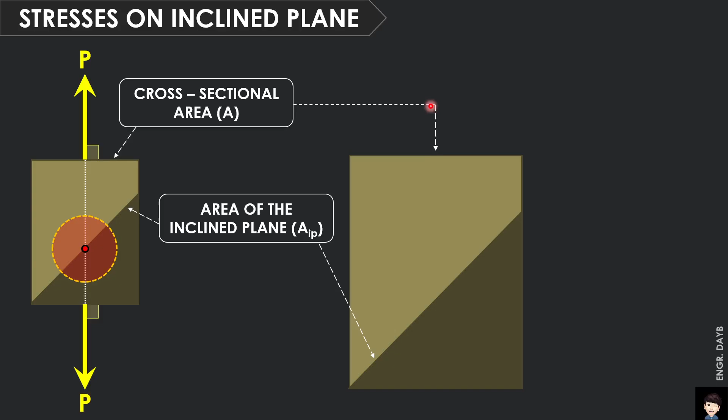Based on your statics, when one force is considered with respect to the inclined axis, we are dealing with XY only, or two-dimensional horizontal and vertical. This force P will be converted, so to speak, into its components. This means it will have a breakdown with respect to this inclined axis. With respect to the area of the inclined plane, there is already an angle involved.

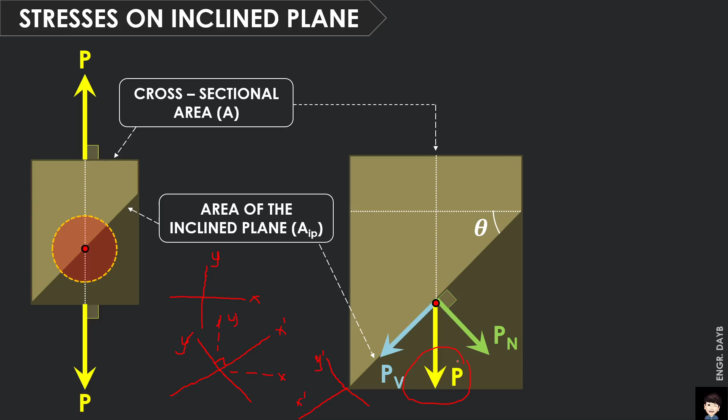Since it's not automatically inclined or parallel, we break it down based on the inclined axis. So you have P sub N, normal, perpendicular. Then you still have parallel, P sub V, due to the inclined plane. Now, how do we resolve these forces?

Consider this again, that's your center point. Based on your statics, we use what's called a force polygon, also known as the parallelogram law, or force triangle, if you recall from your first topics in statics. Since three forces are involved, we form a force triangle. This is force P, this is force shear, and to close the polygon into a triangle, we close it with Pn, P sub n.

And take note, that is 90 degrees, again, with respect to the inclined axis. Because this is the area IP, the area of the inclined plane. Okay? So that you understand better.

Now, if you notice, let's relate this to the inclination. So, with respect to the axis of the cross-sectional area A, this is our area A. Then this is the angle of inclination. So now, let's resolve the triangle to relate this angle.

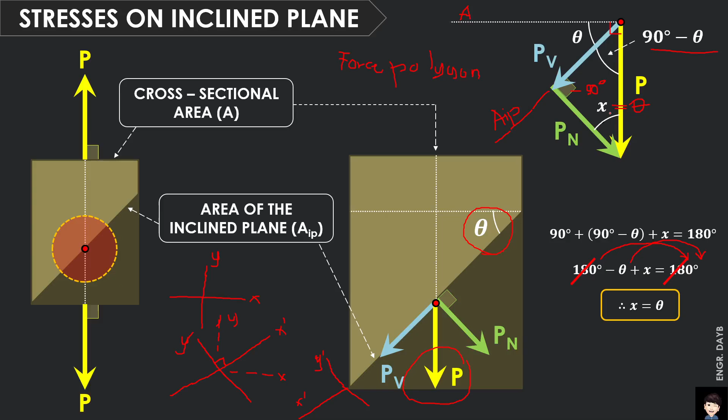Okay, so here it is again. This is our material. This is the cross-sectional area, horizontal. Then this is the area IP, or the area of the inclined plane.

So due to this PN, this normal force, with respect to the area of the inclined plane, will result in normal stresses. That is sigma with respect to AIP. Then this P sub V, the shear force, will also result in shear stresses with respect to AIP, that is tau.

So the concept is still the same, guys. The general concept is still force over area.

Okay, then let's consider this triangle. This small triangle comes from here too. This triangle is at 90 degrees. So we can see the horizontal area, or the cross-sectional area A, then this area of the inclined plane. Then let's consider this one angle.

That is the angle theta. When we solve that, let's recall our trigonometry when solving a right triangle. So we have SOH-CAH-TOA. This SOH-CAH-TOA is very powerful.

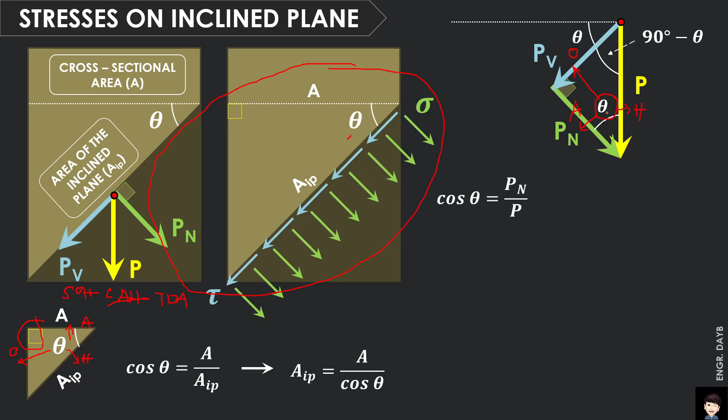Because if you rotate it again, the hypotenuse will become inclined. So, considering Pn and P, that must be adjacent over hypotenuse. This is adjacent, this is hypotenuse, that's why we will use cosine. Then solving for Pn, just cross multiply, so we have Pn is equal to P cosine of theta.

So ngayon, let's solve for the stresses. Diba ang normal stress is equal to simply force over area lang talaga. Pero anong force nang involved? So with respect to area of inclined plane, so we have the Pn over the area of inclined plane. Kaso kasi guys, pagdating sa mga problems, hindi ganito kaagad yung binibigay. Ang binibigay madalas itong P.

So we need to solve those stresses in terms of P with respect to area of inclined plane. So kailangan nating i-convert pa. So itong Pn, gawin nating P cosine of theta over itong area of inclined plane, substitute mo dito yan. Okay. So, we have area over cosine of theta. O guys, hindi magka-cancel yung cosine of theta, kasi from algebra, itong cosine of theta, fraction over fraction, parang ganon, tataas po ito. Okay, magkakaroon ng reciprocal dyan. So, magiging cosine times cosine po yan. So, mangyari, to solve for the stresses, or the normal stress rather, with respect to area of inclined plane, is equal to P over A cosine squared theta.

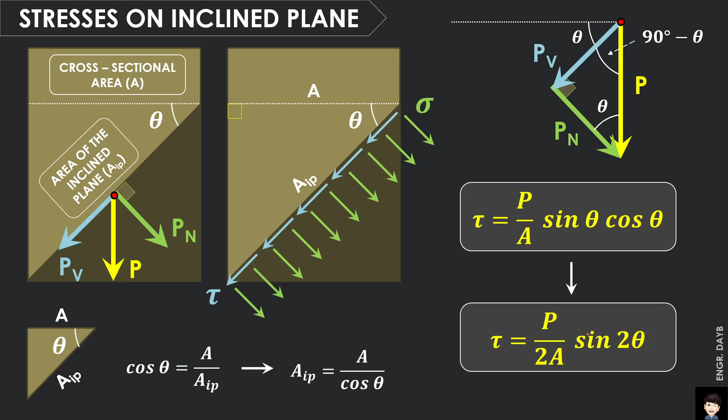Okay? Pero merong another way in order to solve this shear stress, no? Kung gusto nyong gamitin to, pwede rin ipakita natin. So, we have the shear stress is also equal to P over 2A sine of the twice of the angle, theta. So, sir, saan po nanggaling po yan? So, based po yan sa trigonometric identity na take note, sine of 2 theta is equal to twice of sine theta cosine theta.

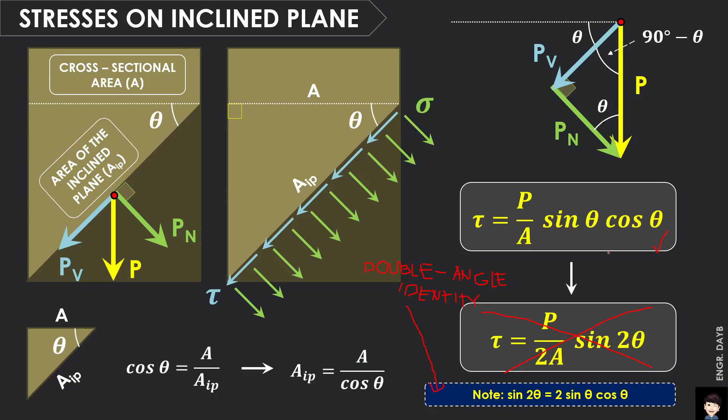So, this is tinatawag nating double angle identity. Okay? Double angle. So, isulat na lang natin for your information. So, double angle identity yan. Hopefully, na-encounter nyo po yan sa trigonometry. Pero kung hindi na, edi additional info nyo na lang. Okay? Identity. Pero madalas, guys, sa problem, kapag ang sinasuggest ko dyan, hindi ito yung gagamitin nyo. Ito. Medyo mahirap kasi yan. Baka malito kayo dyan. So, ito na lang yung gamitin nyo, guys. Balik tayo sa unang konsepto. No? Yung P over A, sine of theta, cosine of theta. Kasi mas madaling gamitin po ito.

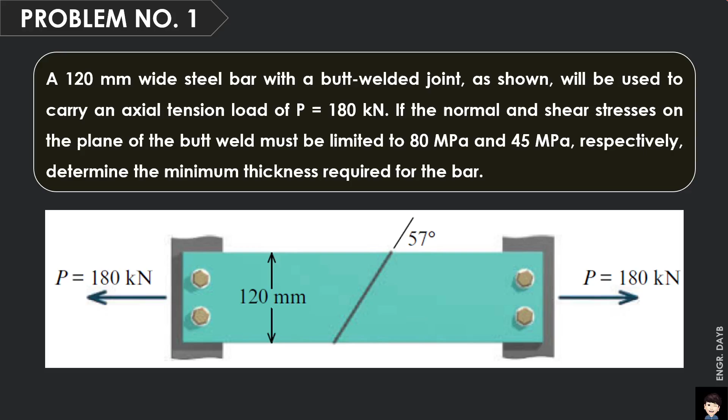Okay? Sige. Solve tayo ng problem. So, I prepared 2 problems for this lecture. So, we have problem number 1. So, a 120 mm wide steel bar with a butt welded joint as shown will be used to carry an axial tension load of P equal to 180 kN. So, if the normal and shear stresses on the plane of the butt weld must be limited to 80 megapascals and 45 megapascals respectively, determine the minimum thickness required for the bar.

Okay? So, kung papansin nyo guys, yung P natin is equal to 180 kN, no? At ito, with respect to the cross-sectional area A, so obserbahan lang muna natin yung problem, no? Para mas madali natin ma-analyze. So, that is the cross-sectional area A. And with respect to its line of action, that is perpendicular to that area. But since binigyan ka ng cutting section, na ito po yun, ito yung naging area of inclined plane natin, which was set to 57 degrees with respect to horizontal.

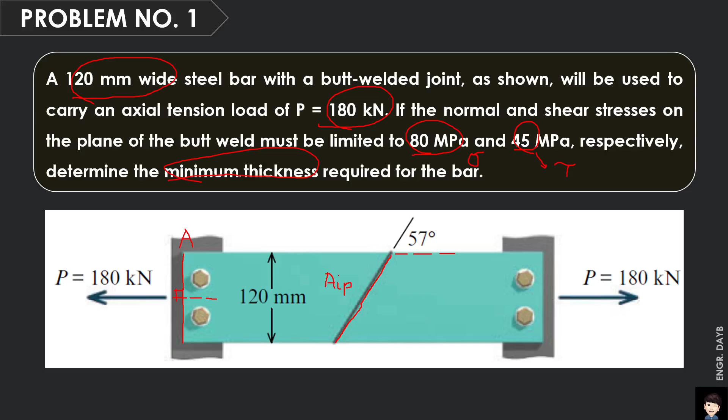Okay? At binigyan ka rin ng mga limiting stresses na dapat i-design mo daw yung thickness ng bar, no? 80 megapascals for the normal, so that is sigma. Then 45 megapascals, so that is for shear or tau, no? Then binigyan ka ng P, 180 kilonewton. Then binigyan ka ng width ng steel bar equal to 120 mm. So kailangan natin i-design yung bar minimum thickness. Okay? Sige, solve natin.

So ngayon, kung mapapansin nyo, with respect to its line of action, ito yung P is equal to 180 kilonewton, ibabangga na natin dun sa area of inclined plane para makita nyo na kaagad. Kaso, di ba, kung naalala nyo, para ma-solve natin yung mga stresses, madadagdagan lang yung P over A, cosine squared theta for the normal. Then for the shear, we have P over A, sine theta, cosine theta.

Sir, edi substitute na lang po natin kasi may binigay ng 57 degrees. Take note, be careful sa mga ganyang problem kasi hindi porket binigay na yung angle, yun na kaagad yung isa-substitute nyo. So, analyze muna natin. Okay? Ano ba yung angle talaga dyan pagdating sa ganyang orientation?

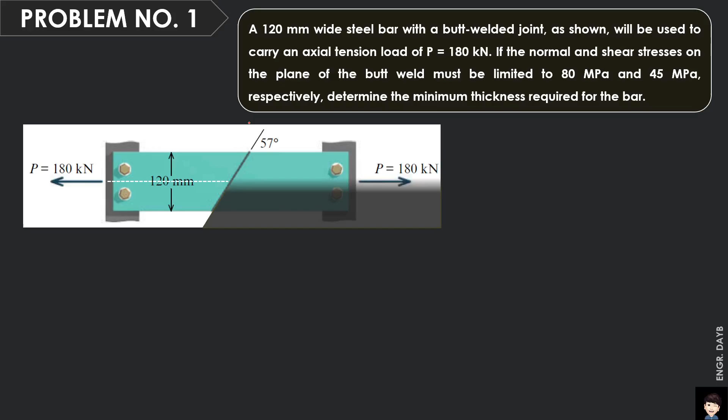So, we have this one. Cut natin yung section. So, you can consider left or either left or right, kung saan yung mas mapapadaling analysis. Then, i-relocate nyo lang or i-transfer nyo lang yung force with respect to its line of action. So, yan yung magiging center ng area. So, dyan mag-a-apply yung force P equal to 180 kilonewton.

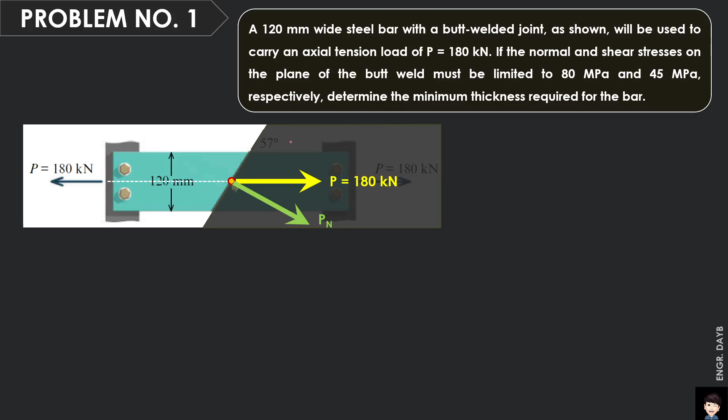And with respect to area of inclined plane, so itong force P, magkakaroon ng components, no? So, meron kang perpendicular, o that is the normal force, P sub n. Then, meron ka ring parallel with respect to the inclined area. So, that is, by the way, this is perpendicular, no? Then, ito, meron kang parallel P sub v. Okay? So, ngayon, analyze pa natin.

So, with respect to horizontal, that is 57 degrees. And this is the area of inclined plane. Okay? Analyze pa natin. So, kung mapapansin nyo, para lang mas makita natin yung orientation, kung ito yung 57 degrees, ano naman to? So, that is also equal to 57 degrees. Kasi naka-base po yan with respect to horizontal.

Okay? Then, ipakita natin yung orientation ng cross-sectional area A. So, kung papansin nyo, ito po yun. So, yan yung A natin. Kaso, ang kailangan nating angle is between, take note is between the area or cross-sectional area A and the area of inclined plane. Ang tanong, yung 57 degrees ba na yon ay in between area and area of inclined plane? Hindi po, no?

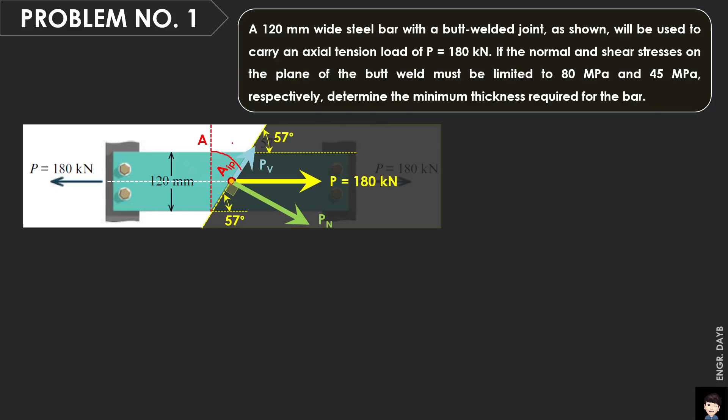So, ang kailangan nating ma-solve is ito. Itong angle na yan, which is angle theta. Kasi based dito sa orientation na yan, o pakita na lang din natin, so itong theta na to, baliktarin nyo lang yung setup, ito na yon, no? Ito yung area A, then ito yung area of inclined plane, and the angle between them, yun ang kailangan nating ma-solve. So, based on this orientation, kung may binigyan tayo ng 57 degrees with respect to horizontal, so ang natitirang angle, so 90 minus 57, so the theta must be equal to 33 degrees.

Okay? So, yan yung gagamitin natin instead of 57 degrees. Kasi kung 57 kaagad na ginamit nyo, automatic mali. Mali yung analysis nyo. Okay? So, ang gagamitin natin ay 33 degrees.

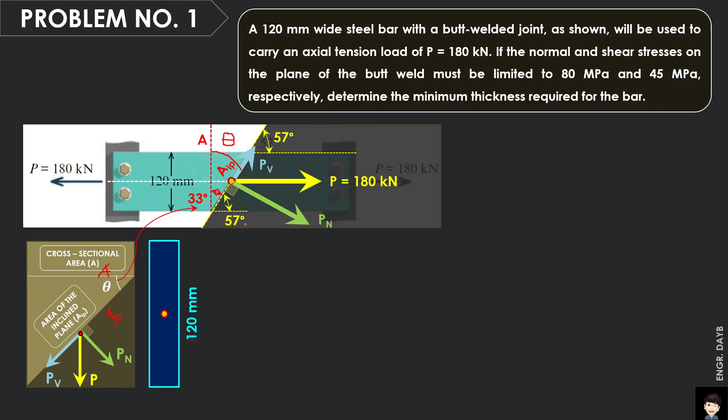So, solve natin. So, itong rectangle pala. So, yan yung makikita natin kapag in-expose natin yung cross-sectional area, no? So, ayan yung center point kung saan dadaan yung P equal to 180 kilonewton. Then, meron siyang dimensions na 120 mm wide, no? Then meron kang thickness ng bar. Okay? Para mas ma-imagine nyo, ano bang area ang ina-analyze natin.

Okay? So we have this one based on the normal stress capacity. So using this formula, sigma is equal to P over A cosine squared theta. Substitute lang natin. So based on the normal stress capacity, we have 80 megapascals. So we have 80 is equal to the force P, 180 kilonewton times 1,000. So ang goal natin dito guys, gaya ng mga previous problems natin, kailangan natin maging result unit ng stress ay megapascals. So, in order to solve for the megapascals, kailangan yung force mo magiging newton. Okay? So, multiply lang natin ng 1,000.

So, we have 180 times 1,000 over the horizontal area or the cross-sectional area. Okay? Na hindi inclined kasi magpapa-incline lang yan kapag meron ng angle. So, we have the area of the rectangle, we have 120 times the thickness. Then, para ma-consider natin yung area of the inclined plane, so we will multiply the cosine squared of 33 degrees. So, kapag sinolve nyo yung thickness based on the normal stress capacity, so magkakaroon ka ng 13.1882 millimeters. O sir, yan na po ba yung sagot? Siyempre hindi pa. Kasi normal stress lang yung kinonsider natin.

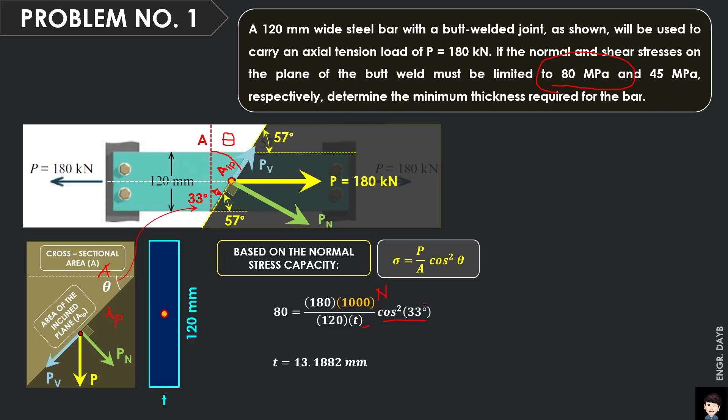How about the shear stress? Okay? So based on the shear stress capacity, so we have this formula. Again, the tau is equal to P over A sine of theta cosine of theta. Then direct substitute lang natin. We have the 45 megapascals for shear stress is equal to 180 times 1,000 ulit. To convert it to Newton over 120 times T corresponds to the dimensions of your area.

But then to consider the effect of the area of inclined plane, we need to multiply it to sine of 33 degrees and cosine 33 degrees. Then upon solving, we can now get 15.2258 millimeters thickness. Okay, sir, we have two values of thickness.

Ano ang gagawin po natin or anong pipiliin po natin in order to consider the minimum thickness required for the bar? O sir, pag sinabi po bang minimum, yung pinakamababa ka agad? Siyempre hindi. Okay? So kung naalala nyo dun sa kapag nagsasolve tayo ng force, okay? 'Di ba kung makikita niyo yung superlative term ng katabi ng force is largest. So determine the maximum force required, determine the largest force, pero ang kino-consider natin ay yung smallest.

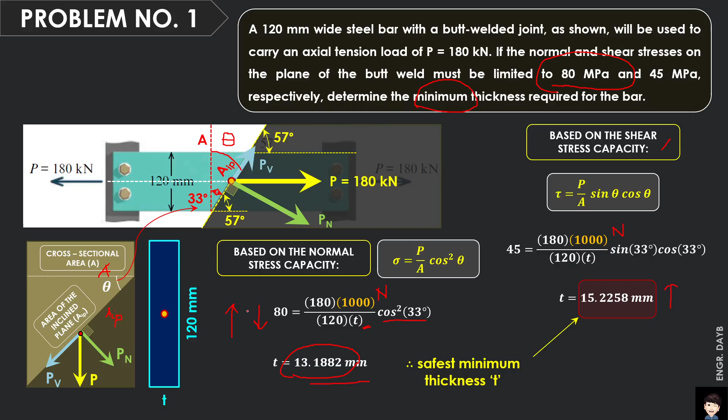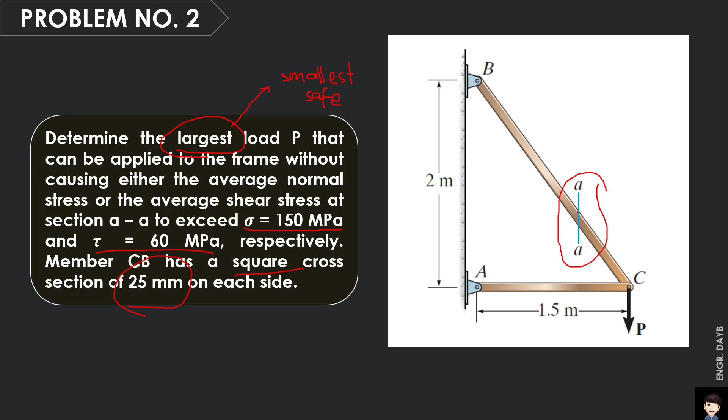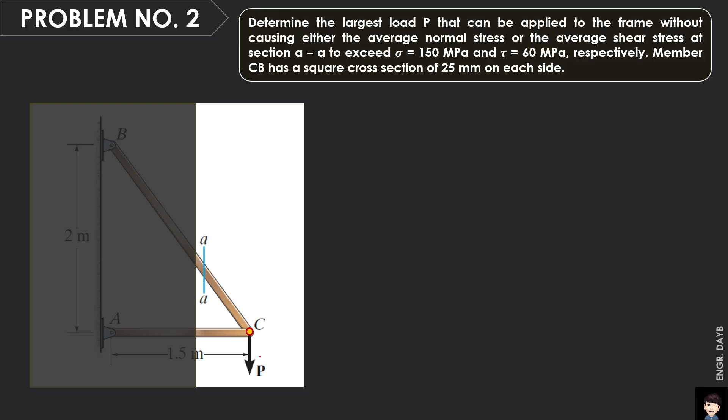O, sige, pakita natin kung ano ba yung pagkakat ng section. Sige, solve natin tong last problem. So, mag-cut ka ng section based on the given orientation ng section AA. So, cut natin dyan. You can solve this frame from the concept of truss, kasi sa truss, meron tayong method of joints, meron tayong method of section. So, in this case, we can analyze at joint C to consider the effect of the load P applied.

So, ngayon, kapag nag-analyze tayo sa joint C, edi consider natin yung mga possible forces. So, meron kang force AC, ang first assumption natin is palayo sa joint. Then, we have this force BC. Kaso, itong force BC natin is naka-inclined ulit. So, ngayon, kaso walang binigay na angle, saan natin kukunin yung magiging inclination ni force BC?

So, based on the dimensions, here we have 2 meters along the height or the vertical and 1.5 along the horizontal. Kapag ginawan mo yan ng slope, triangle, so we have here, ito yun, tin 2, 1.5. Then, iayusin lang natin para walang mga decimal, i-times 2 mo yan, magiging 4, 3. So, ibig sabihin, perfect triangle pala yan, 3, 4, 5, right? So, meron kang slope na 3, 4, 5. Kung nalilito kayo dyan, pwede nyo naman gamitin yung 2, 1.5, then get the tawag dito, the slope along the hypotenuse, using Pythagorean theorem. So, you have 3, 4, 5 slope.

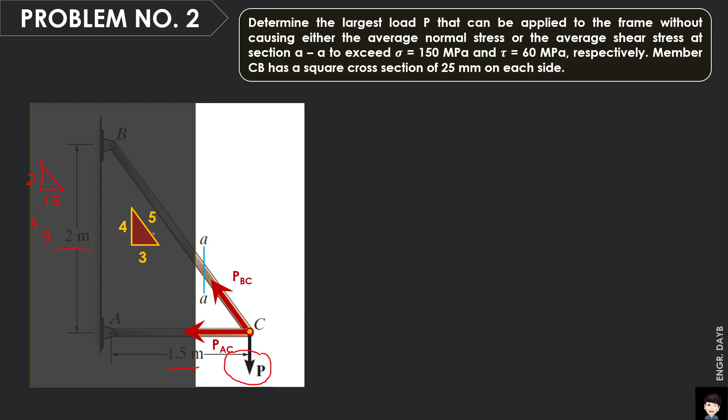So, analyze natin at joint C. Kaso, kung mapapansin nyo, yung section AA, doon tayo nag-cut sa member BC. So, ibig sabihin, kailangan nating ma-relate yung force ni BC with respect to the applied load P. Ibig sabihin, wala na pala tayong pake kay AC, kasi si member BC lang naman yung kinat natin. Yun yung i-design natin, o member CB, or nabaliktad lang. So, unang tingin, since itong largest load P ay naka-vertical, edi dapat isolve natin yan using summation of forces along vertical in order to consider the orientation of P, pati itong force BC kasi pwede nating i-component yan. And then, at the same time, mane-neglect natin yung effect ni force AC, kasi si force AC is along horizontal kaagad.

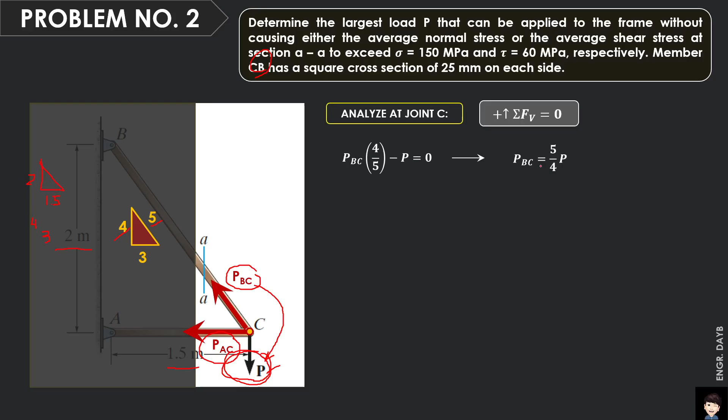So, summation of forces along vertical equal to 0. So, we have force BC upward. And then, the vertical component slope, we have 4 and 5. So, 4 over 5 minus P equals 0. So, solving for the value of force BC in terms of P, magiging force BC is equal to 5/4 of P. Ito, transpose nyo lang dito yan, magiging positive P, then cross multiply yung 5, then itong 4.

Ngayon, analyze natin itong member na to. Ito yung member CB or member BC. Consider natin yung pag-cut ng section AA. Pa-vertical siya, so this is section AA. Saan ba nag-act yung force BC?

So this is the area of inclined plane. Kung iisipin, ito yung cross-sectional area A. Ito yung area IP, the inclined plane. So that is the center point kung saan dadaan yung force BC.

Ang ganito guys, ang kailangan natin is binigyan ka ng stresses, at kailangan natin masolve yung P. Meron ka na rin binigyan ng area, which is 25, square pala yan, no, square. Yan yung cross-section niya, 25 by 25. Madali lang naman kunin yan, 25 squared. Kaso ang kailangan natin guys is the angle.

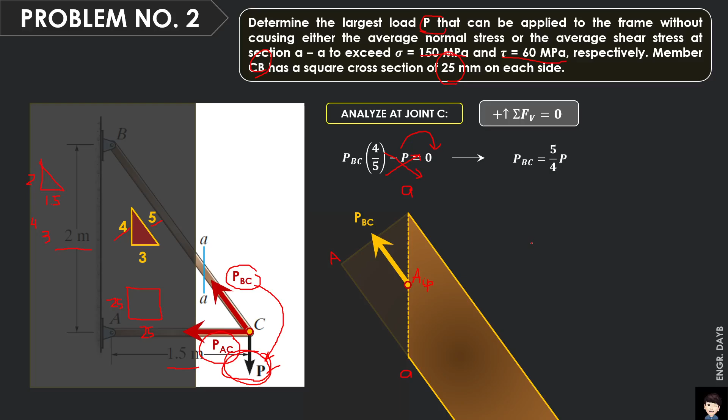Paano natin isolve yung angle dito? Doon tayo magre-reference sa binigay na slope na 3, 4, 5. Recall lang natin para maging guide natin, we have this 3, 4, 5 triangle slope.

Pero kapag magko-consider tayo ng angle theta, it must be in between the area of inclined plane pati yung area mismo na cross-sectional. So ito po yun, that is the angle theta. So this is the A. Kung ipa-plot natin, ito yung kailangan nating masolve.

Kumpletuhin pa natin. Kung ito ay angle theta, then this is equal to 90 degrees, so matitira dyan is 90 minus theta. Kung i-relate natin para mas makuha natin yung value ng theta, ito ay also 90 degrees. Ano yung natira? 90 degrees minus itong 90 minus theta, ang matitira ngayon ay theta. Ibig sabihin, itong theta pwede natin makuha in terms of given 3, 4, 5 triangle slope.

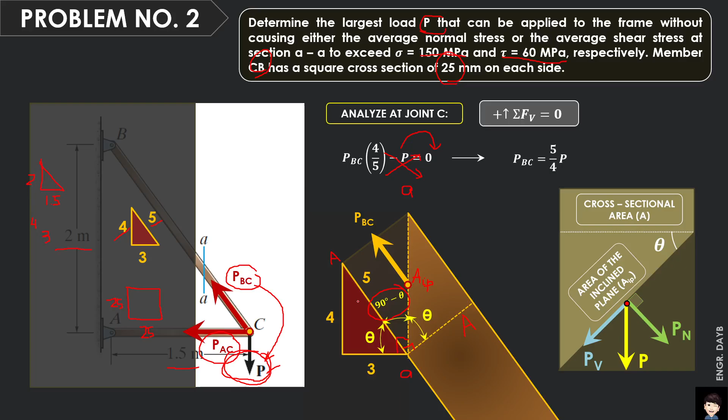Dyan tayo magbe-base ng computation. Sige, solve pa natin. Yung force BC is equal to 5/4 of P. Magiging mangyari dyan, we have the sin theta is equal to 4/5. Kunin na natin yung sin theta pati cosine of theta kasi kailangan yon based on the given formula.

So the sine of theta based on the triangular slope, so we have opposite, katapat rather, then we have the hypotenuse, OH. So sine of theta is equal to 4 over 5. Then same with cosine, adjacent, katabi, so we have 3 over 5 naman.

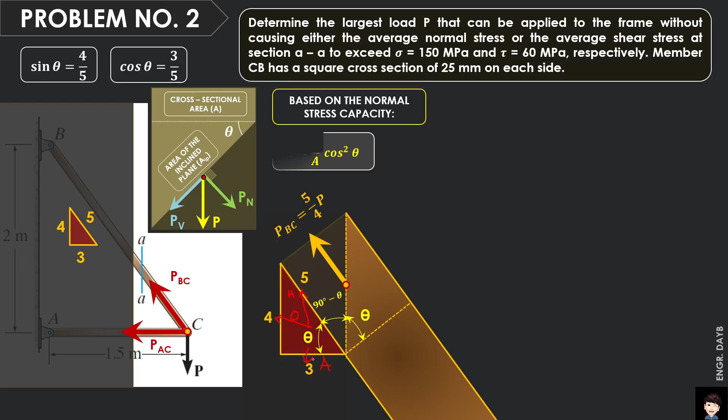Based on the normal stress capacity, we have this formula, sigma is equal to P over A cosine squared theta. Salpak lang natin. So we have the limiting normal stress equal to 150 megapascals. Then yung P na kailangan natin makuha for the force BC is equal to 5/4 of P over the area.

Pakita na natin ulit yung cross-sectional area, this is 25 by 25. And then to consider the area IP, again, this is the area IP or the inclined plane. So we have 3/5 squared.

Bakit nawala po yung cosine? Kasi nga po, yung cosine of theta, nireplace na natin as 3/5. Wala na tayong kinuhang angle in terms of slope na yung kinuha natin. So in that case, yung cosine squared theta, since cosine theta is 3/5, therefore yung cosine squared is equal to 3/5 squared. Then solve for P.

Ito ay naka in terms of Newton. Kasi bakit? Yung 150 natin naka megapascals. Then yung area of cross section naka in terms of millimeter squared. Therefore, base sa first lecture natin, yung megapascals is equal to Newton over mm squared. Therefore yung force na makukuha natin ay in terms of Newton.

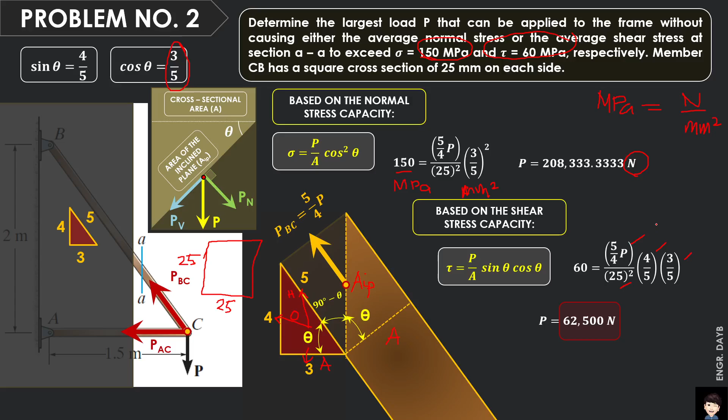That concludes our lecture. This is again the largest safe force.